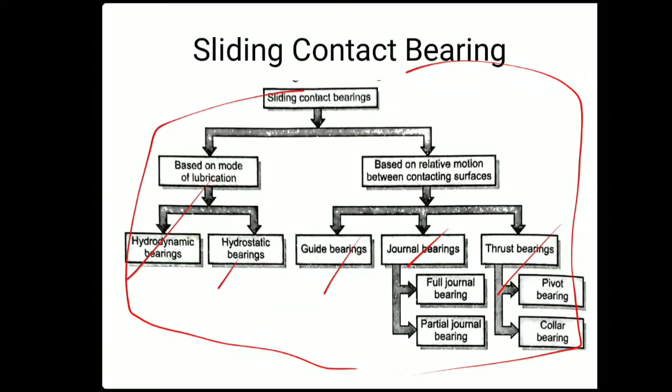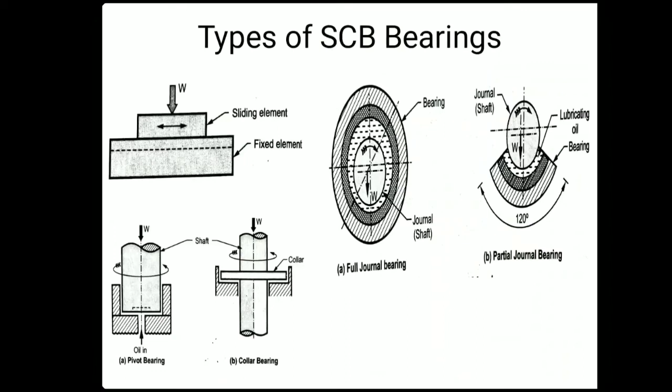Now in the last session we have seen what is the lubricant, what are the types, how it can be classified. So this will be the sliding contact bearing and its description we have seen. Next part, we have also seen the structure, actual use, what hydrostatic means, and the types of bearings. Now the next part is very important. We need to compare hydrodynamic and hydrostatic bearings. So I'll explain one by one very easily.

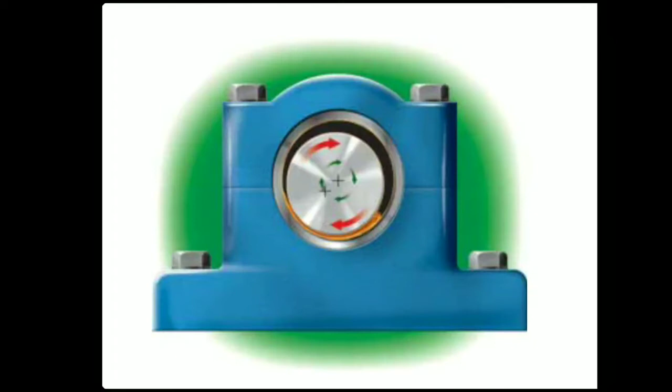Just keep in your mind two figures. This is the first, that is hydrostatic, and this one is the second, hydrodynamic. Hydrodynamic works by itself through the rotation of the shaft. Here it will work using a pump. So keep in mind these two diagrams. On the basis of that I'll explain the difference.

First point, simplicity of design. What happens actually in case of the hydrodynamic bearing, the lubricating oil is situated in between shaft and bush, so it is inbuilt. So there will not be required any specific arrangement or specific design for that.

But in case of the hydrostatic bearing, using a pump, we need to find out what will be the force, what will be the nature of the force, laminar or turbulent, according to the flow of the fluid. First thing. Second thing, the pump design, what HP pump is required. So this kind of design we must know. That's why it is quite complicated to design a hydrostatic bearing.

Second point, initial cost. Initial cost of the hydrodynamic bearing is low. Why? Because no external parts are there. But in case of the hydrostatic bearing, external parts are required, such as a pump and lubricating oil. If the viscosity of the lubricating oil changes during operation, we need to change it. So there is circulation cost, so the cost is high.

Third point is maintenance cost. So again I told you, the hydrodynamic bearing is low cost because it hardly requires maintenance. It means that if the viscosity changes, that oil can be changed and again it can be reused. But in case of the hydrostatic, the total oil is changed, we need to check the pump, pump maintenance is there, so again it will be costly to maintain.

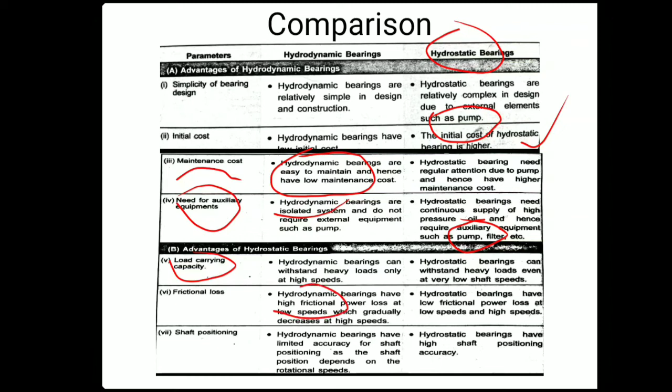Next point is frictional loss. The hydrodynamic bearing has high frictional loss. Why? Because we have seen this figure, if you remember. This figure indicates that at rest the shaft touches the bearing. At initial start, the shaft touches and friction will be created, and then finally at full speed it will rotate smoothly.

So because of that the frictional loss is high in the sliding, that is the hydrodynamic bearing. But in case of the hydrostatic bearing, the shaft is held by the lubricating oil with the help of the pump, so it will not create friction between the surface of the shaft and bush.

Next will be shaft positioning, very important. In case of the hydrodynamic bearing, it can accommodate misalignment, because you can see the shaft is floating, correct? We cannot maintain the center every time. Here you can see a different center, here different, here different. So it will not maintain the center or CG of that respective area.

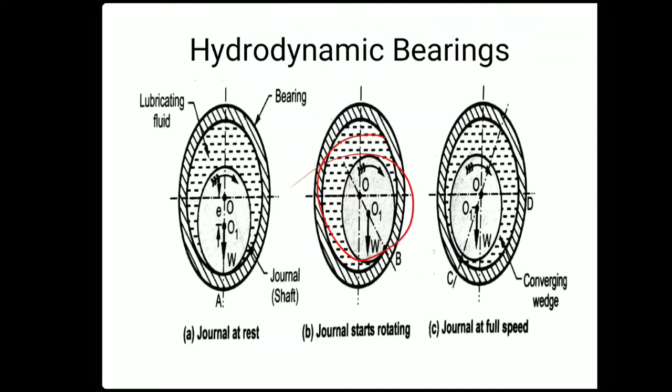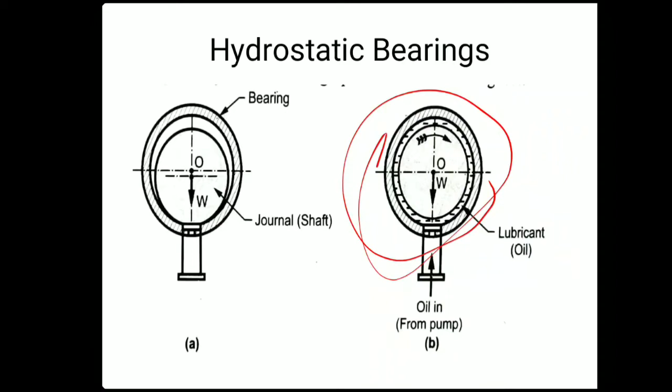That's why misalignment can be accommodated. But in case of the hydrostatic bearing, the shaft positioning is always at the center. Always at the center. If it changes, then there will be chances of friction. Clear? So these are the basic comparisons between the hydrodynamic and hydrostatic bearing.

Now we'll move toward the next point, that is viscosity. So basically we all know what viscosity is. It is a property of the fluid which creates a frictional resistance between the moving plates, two contacting surfaces. You can see this hatched portion. This is the fixed plate, this is the moving plate, and the moving plate is at height h, with velocity v. All are moving relative to one another.

So in that case, what happens? Viscosity is nothing but the property which creates the frictional resistance between two moving parts. It means that the lubricating oil is situated in between the moving and fixed plate and they try to rub on one another, and that frictional resistance creates viscosity, correct? So how can we define this? In between the moving and fixed plate, a shear stress will occur at the time of working. Shear stress we denote by tau.

Now this shear stress is of the fluid. It is also called fluid shear stress. It can be defined as: shear stress is directly proportional to dV by dH. So what are dV and dH? That is velocity with respect to height, how the velocity changes with respect to height. That equation is tau is directly proportional to dV by dH.

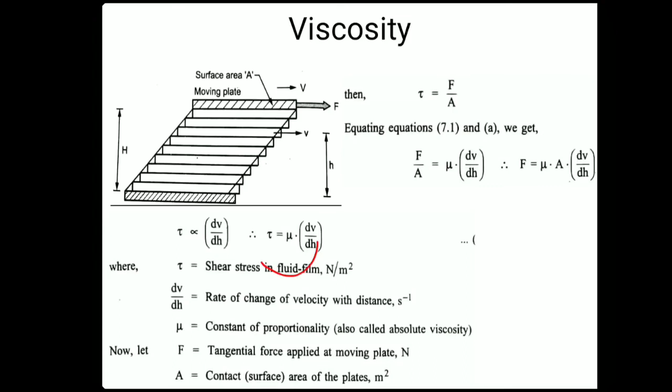Next part is absolute viscosity, mu, which we have seen previously. I can convert this easily: mu is equal to tau divided by dV by dH. So that I have written over here. Absolute viscosity can be defined as the shear stress in the fluid with respect to velocity, correct? Shear stress occurring in the fluid with respect to velocity in between the moving and fixed plate. So that is absolute or dynamic viscosity, correct?

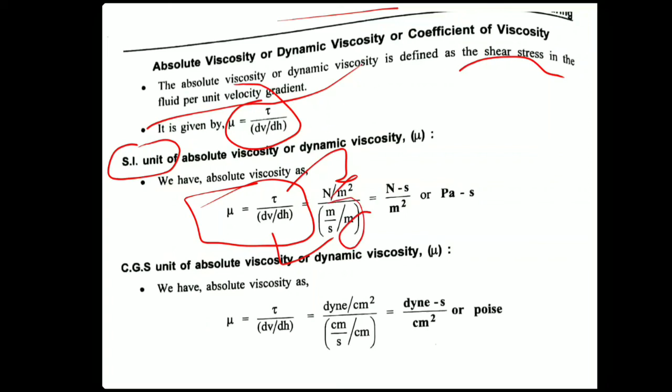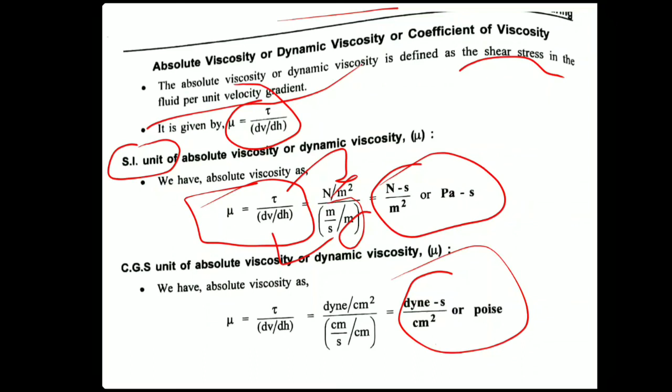Next is the SI unit for viscosity. As we know, dynamic viscosity mu is equal to tau divided by dV by dH. Tau, shear stress, is in Newton per meter square, and in dV by dH, velocity is in meter per second and height in meter. So it gives you Newton second per meter square. It is also called Pascal second. Clear? In CGS units you can see dyne second per centimeter square, that is poise.

Now these are some formulations, just keep them in your mind: 1 Pascal second is equal to 10 poise, 1 poise is equal to 100 centipoise, cP, and 1 Pascal second is equal to 1000 centipoise, and 1 centipoise is equal to 10 raised to minus 9 Newton second per millimeter square, correct? So this will be the relation for the centipoise.

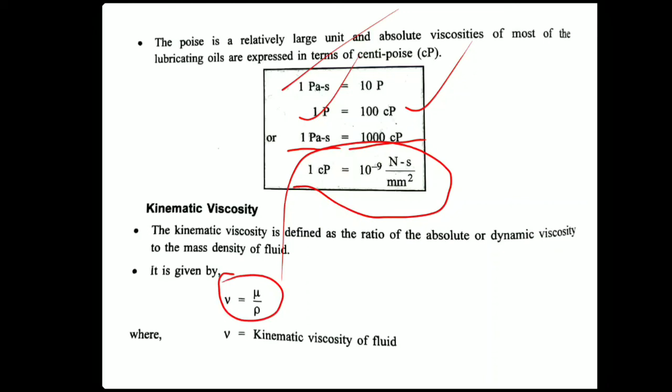Now next is kinematic viscosity. Kinematic viscosity is the ratio of absolute or dynamic viscosity to the mass density of the fluid, that is rho, mass density.